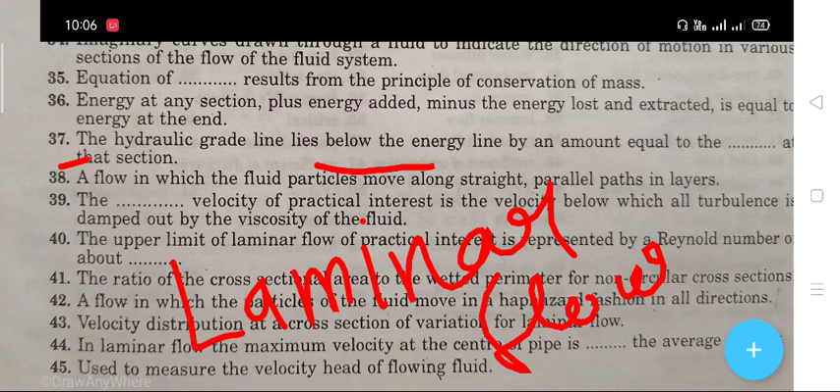of a particle... interest is the velocity below which all the turbulence is damped out by the viscosity of the liquid, viscosity of the fluid. The right answer is that critical velocity. यानी कौन सी velocity होगी? वो critical velocity होगी. Which velocity is critical velocity?

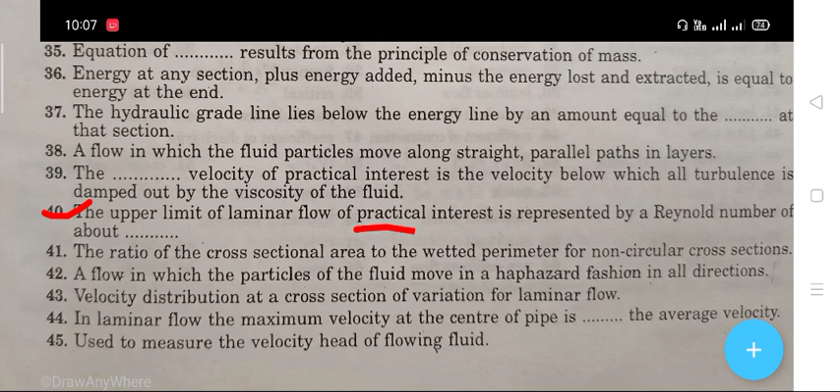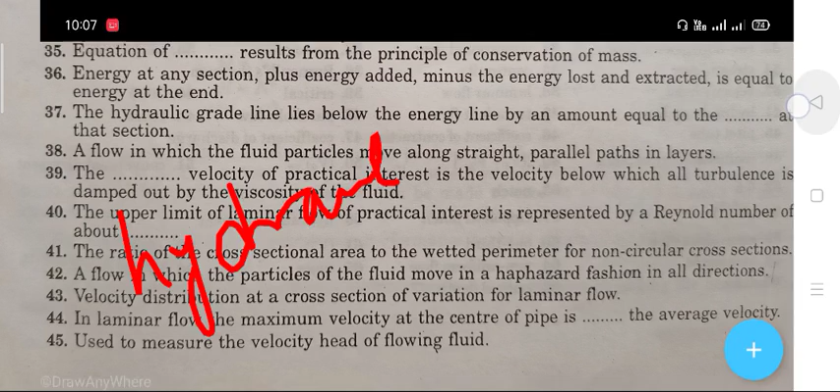Is 2000. Next question, question number 41. The ratio of the cross sectional area to the wetted perimeter for non-circular cross sections. What is the right answer? Hydraulic radius. क्या होगा right answer? Hydraulic radius. The next question, क्वेश्चन नंबर 42।

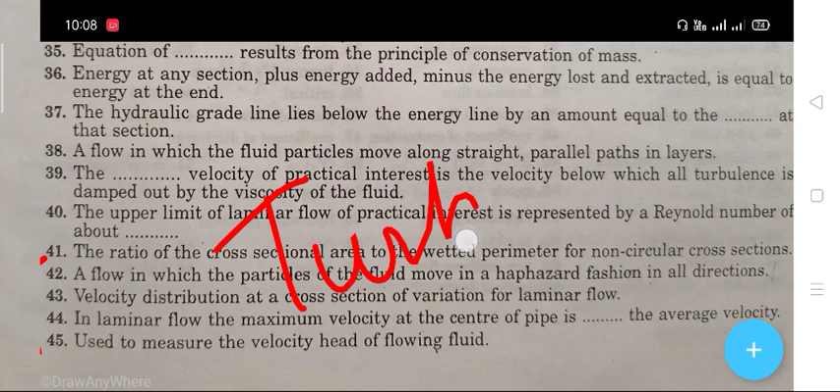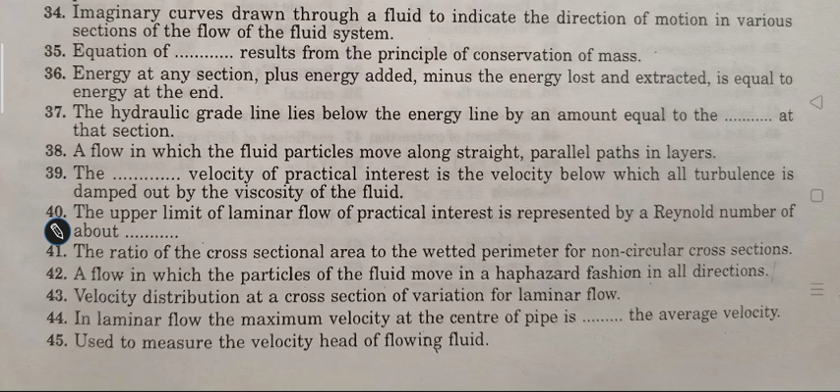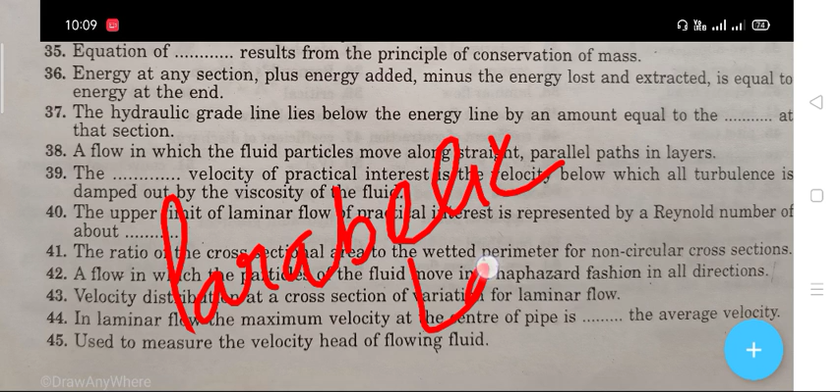The next question, question number 43. Velocity distribution at a cross section of a variation for laminar flow. Velocity distribution at a cross section of variation for laminar flow. What is the right answer? Parabolic law. क्या होगा right answer? The parabolic law. The next question, question number 44.

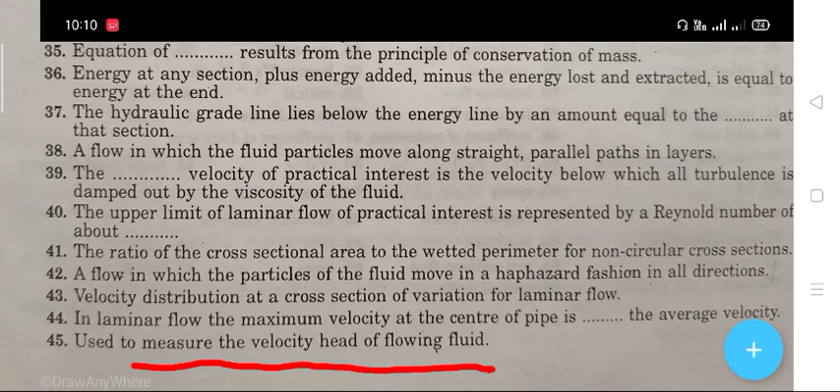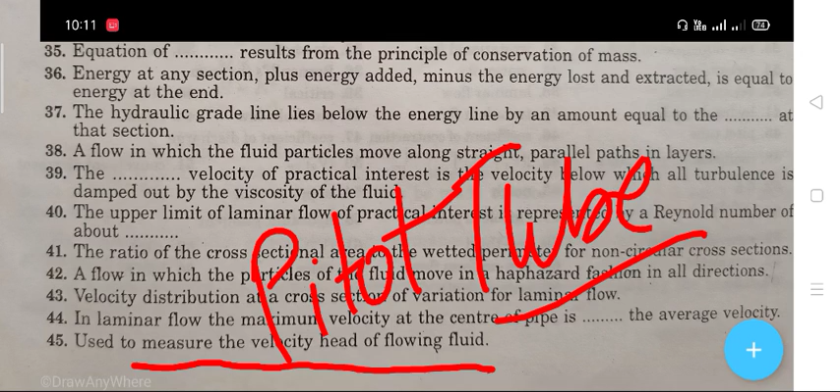Used to measure the velocity head of flowing fluid. The right answer is pitot tube. Pitot tube is the right answer. Next question, question number 46. The ratio of area of jet at the vena contracta and the area of orifice. The right answer is coefficient of contraction. Coefficient of contraction is the right answer.

Next question, question number 47. The product of coefficient of velocity and the coefficient of contraction. What is the right answer? Coefficient of discharge. Next question, question number 48: the ratio of loss of kinetic energy in the orifice and the actual kinetic energy. 48 का right answer हो जाएगा coefficient of resistance.

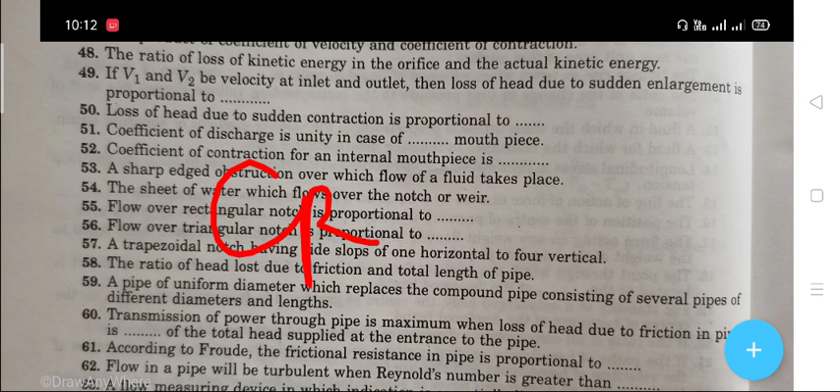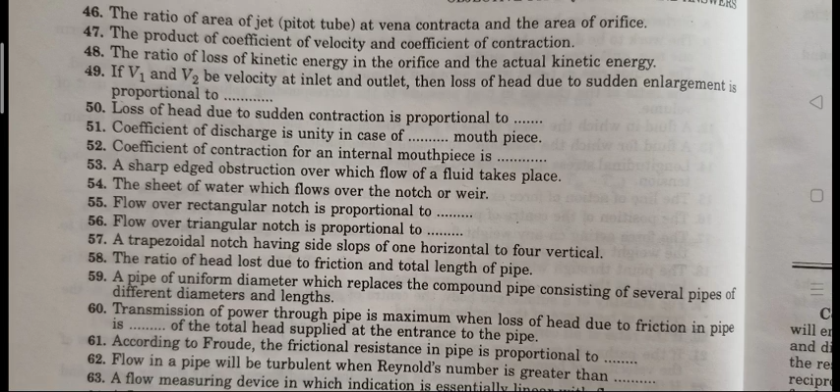The next question, question number 49: if v1 and v2 are the velocities at inlet and outlet, then loss of head due to sudden enlargement is proportional to what? इसका right answer हो जाएगा (v1 minus v2) whole square. The next question, question number 50.

Question number 50: loss of head due to sudden contraction is proportional to v squared.

Question number 51: coefficient of discharge is unity in case of which mouthpiece. The right answer is convergent-divergent mouthpiece. Question number 52: coefficient of contraction for an internal mouthpiece is, the right answer is 0.5.

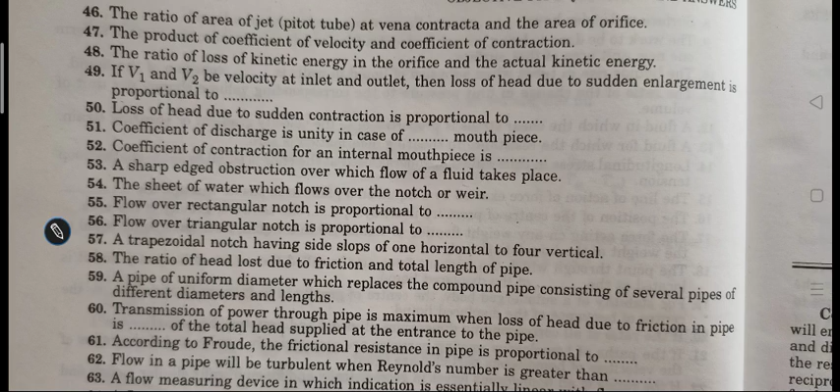Question number 53: a sharp edge obstruction over which flow of a fluid takes place. The right answer is notch.

Question number 54: the sheet of water which flows over the notch or weir is called. The right answer is nappe or vein.

Question number 58: the ratio of head loss due to friction and total length of the pipe. The right answer is hydraulic gradient.

Question number 59: a pipe of uniform diameter which replaces the compound pipe consisting of several pipes of different diameters and length. The right answer is equivalent pipe.

Question number 60: the transmission of power through pipe is maximum when loss of head due to friction is what fraction of the total head supplied at the entrance of the pipe. The right answer is 1/3.

Question number 61: according to Froude, the frictional resistance in pipe is proportional to V squared.

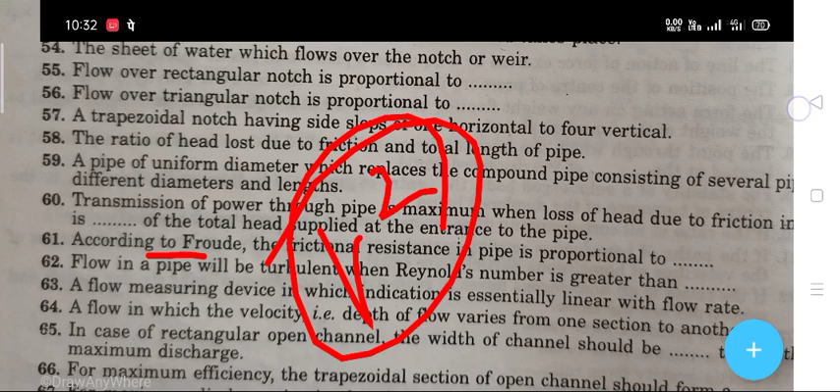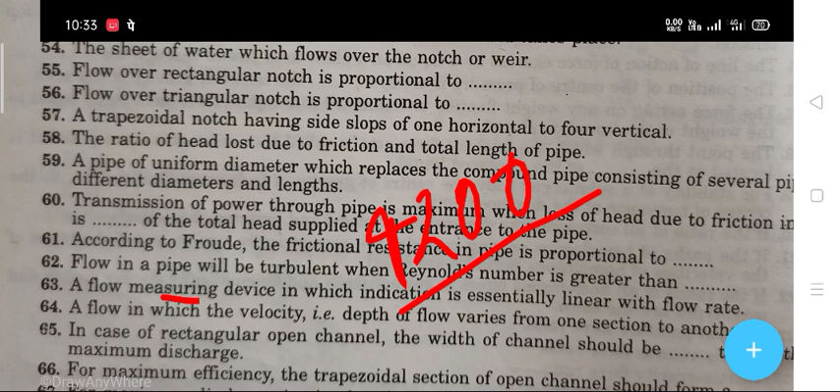Question number 62's right answer was that flow in pipe will be turbulent when Reynolds number is greater than 4200. Question number 63: a flow measuring device in which indication is essentially linear with flow rate.

The right answer for question 63 is rotameter.

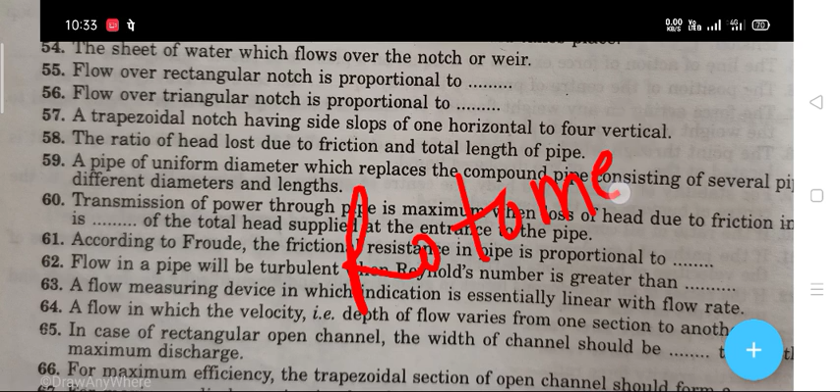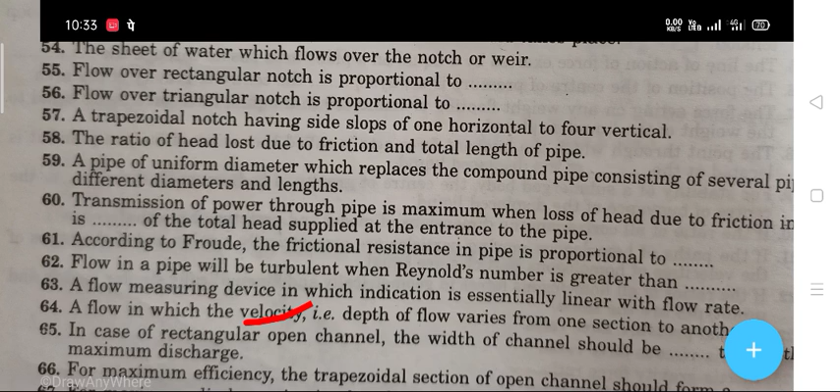Question number 64: a flow in which the velocity or depth of flow varies from one section to another. The right answer is non-uniform flow.

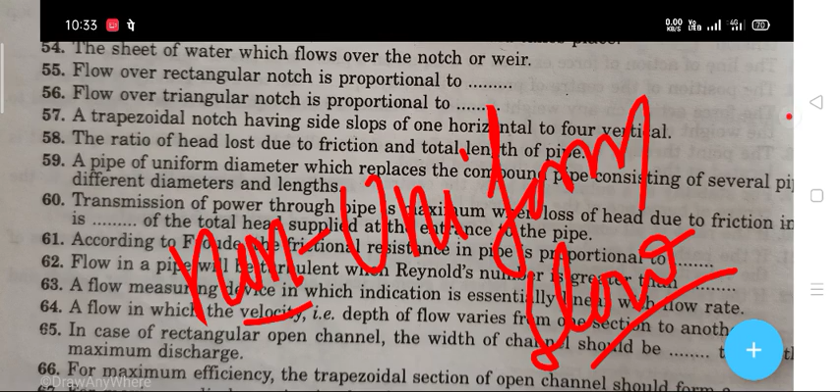Question number 65: in case of rectangular open channel, the width of the channel should be how many times the depth for maximum discharge. The right answer is twice.

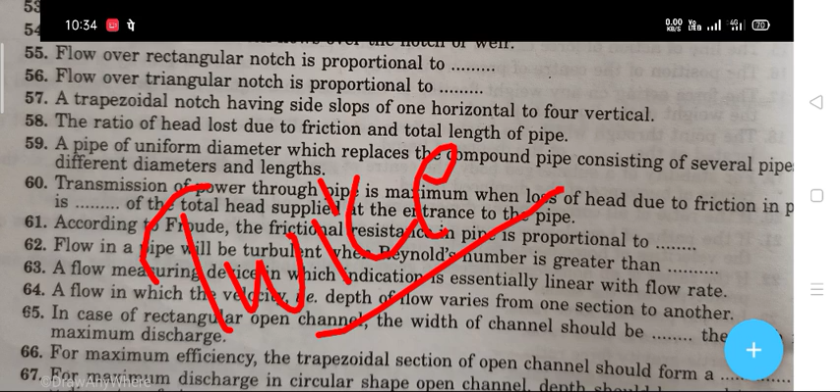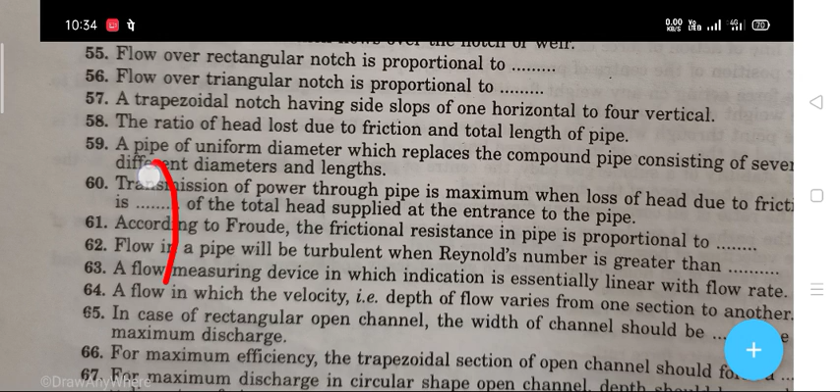Question number 66: for maximum efficiency, the trapezoidal section of an open channel should form a shape. The right answer is half hexagonal.

Question number 67: for maximum discharge in a circular shaped open channel, the depth should be equal to what fraction of the diameter of the pipe. The right answer is 0.95.